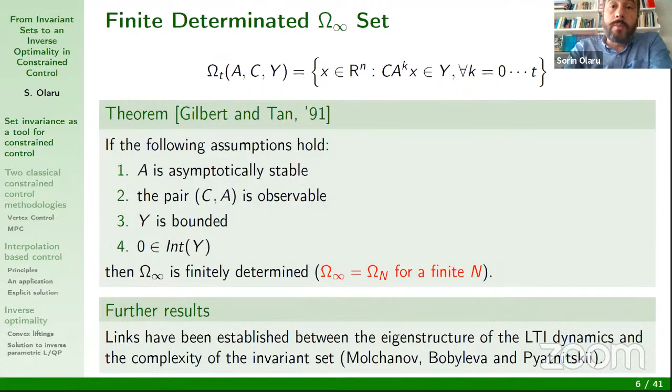The links between the eigenstructure of the linear operator defining the dynamical system and the complexity of the invariant set has been studied in some classical works coming from the Russian school, with Molchanov, Bobyleva, and Pyatnitskii.

And I will add to this broad picture and basic definition some links of set invariance with stability. If somebody provides me a set, I'm not trying anymore to construct the invariant set myself. Somebody, an oracle, comes and gives me a polyhedral set, and I have to certify if this set is positive invariant with respect to, again, let's take a simple dynamic here.

Well, in the 80s, there was a very elegant result showing that such a property can be certified by the existence of a matrix H with non-negative elements, and this non-negative property of the elements of H is very important, satisfying some simple linear inequalities. I won't enter into the proof of these results, but I will only stress that the constraints here are linear. So practically the certification is passed through a very simple resolution of a linear program.

At the same time, another important aspect is that the non-negativity of the elements of the matrix H relates the constraint linear dynamic to a positive dynamical system of dimension R, where R is obviously different from N. So we have positive invariance if there exists a sort of comparison system which respects the same stability properties, but has on top of that some positivity characteristics.

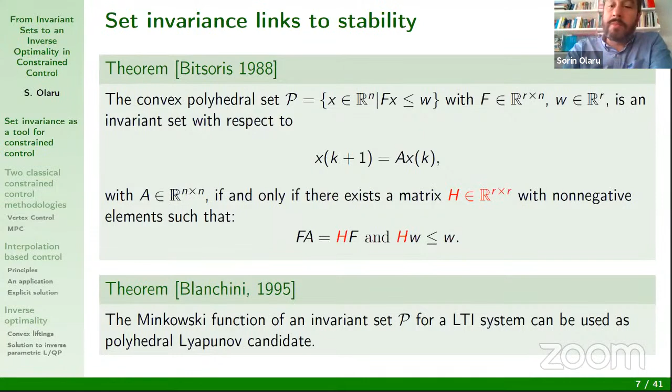Going further, for any invariant set which is endorsed with some contractiveness properties, we can use the respective invariant set as a polyhedral Lyapunov candidate, and this proved to be a very versatile tool in the analysis of different classes of dynamical systems, like hybrid systems, switched systems, linear parameter varying systems, and so on.

Okay, in the few slides I've shown so far, the system was autonomous. Well, what happens when the system we're dealing with is to be controlled? We can choose the input U in order to enhance the positivity properties. For example, if the system is not stable, U will have the main objective of stabilizing the system. And then additionally, we can look further and try to enlarge the positive invariant set related to the closed-loop functioning. So the definition is simple.

So now any initial condition in the set has to have an associated control law, and this control law will drive the trajectories, at any future time step, to stay within the set, not violating the constraints. Again, the same question: can we construct these sets? And the answer, at least in the linear case, is positive.

Yes, for discrete-time linear systems, for example, we can pass by the Minkowski addition of the different bounded sets in the assumptions, like the state constraints and the input constraints, and we can construct a sequence of sets. These sets approach the maximal control invariant set.

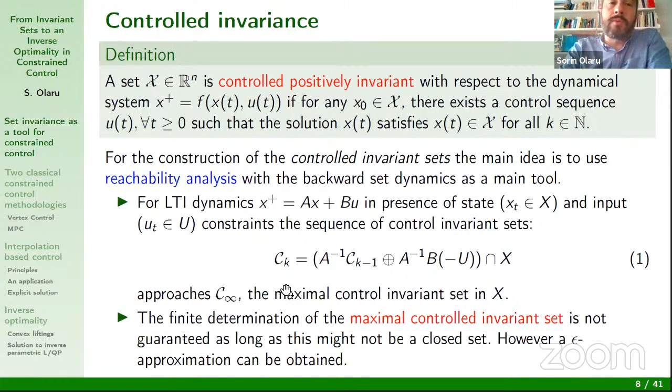So, well, having these tools in our backpack, we can look at different ways that control engineers design feedback control in order to satisfy constraints and enlarge the domain of actions. A historical strategy, by now more than 30 years old, is the so-called vertex control, established by Per-Olof Gutman and his collaborator Cwikel in '86.

At that time, the parlance wasn't talking about control invariance, but if you look at the conditions established there, they said the necessary and sufficient condition for stabilization of an LTI system with polyhedral state and control constraints is to have, at each vertex of the feasible set we're trying to characterize, at least one control U that brings the state to the interior of the set. That's exactly the definition of control invariance. So practically, they link constrained control design to the existence of a control invariant set.

More than that, the result proposes a practical way to combine those extreme actions at the vertices of the feasible domain. At each vertex, there is a vector field, or one-step control action, which pushes the trajectories within the set. Based on the control action at each vertex, we can split the feasible domain into simplices, and in each simplex we use a convex combination of the control actions on the extreme points. That's the essence of vertex control: use convex combinations of the extreme control actions on the boundary of the control invariant set, giving us a closed loop system.

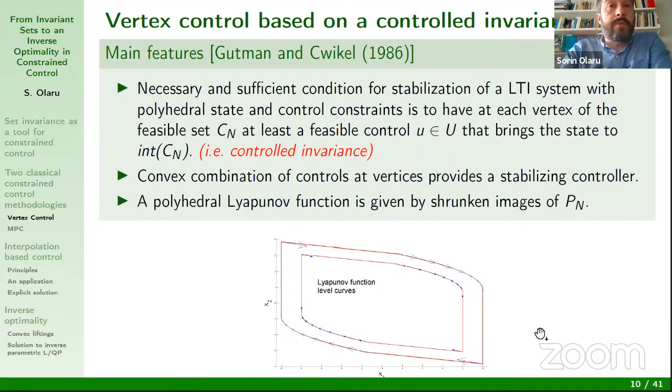It's one of the first methodologies that starts from sets and builds a control action satisfying the constraints and ensuring closed loop stability. Of course, since we have a control invariant set, this relates to the existence of a polyhedral Lyapunov function, and because we're practically shrinking the Lyapunov function, we have a homotopy between the feasible set and the Lyapunov function level curves.

That was vertex control—a very simple approach. Once we design a control, we have a control invariant set with only the control action on the boundary, and we can completely fulfill the control definition in the interior. But that doesn't come with any performance whatsoever. And we know from optimal control theory that we can design elegant and mathematically sound theory starting from the optimal control framework.

The problem with the optimal control framework in conjunction with constraints—with the existence of state and input constraints—is that it becomes intractable. So the control action there cannot be solved with an optimization in real time. Of course, there are cases when we can find a bang-type policy, but those cases are rather particular.

Then in the 80s and 90s, the so-called model predictive control came with a framework for designing constrained control based on optimality. There's an optimization of a cost function that runs on a finite horizon from the current step in the system evolution to k plus n—that's the prediction window—to which we add a final term, a penalty on the final state, and then add the state evolution constraints and all the static constraints from the state and input limits, and, very importantly, a terminal constraint.

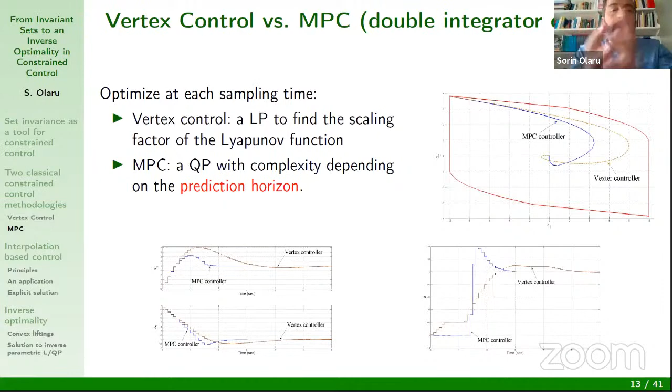But in between these two extremes, for a long time, there was nothing to bridge the gap. If I want to be not that performant, but a little bit faster, what is to be done? Then in the years 2000, there was research attention dedicated to how to speed up the MPC implementation.

And we reached the era of the so-called explicit MPC, where the Karush-Kuhn-Tucker optimality conditions have been used to express this optimization problem, which is solved at each moment in time, practically exploiting the active sets and the optimality conditions in order to devise an explicit formulation.

So it has been shown that practically the feasible set can be partitioned into a union of polyhedral sets, and within each such polyhedral set, we can define the optimal control action in terms of an affine state feedback. For example, again for the double integrator we saw before, for this type of simulation, the control action is given.

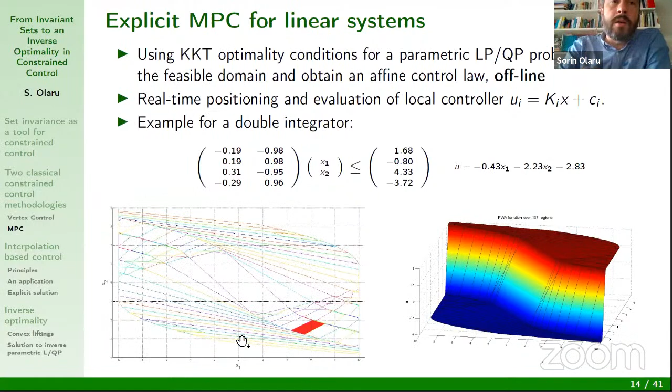So what we can do, if we have only the outer set and the inner set, to avoid high computational load, given a state at some current time step, we can look for a pair of points: XO, which is in the inner set, the control invariant set with high performance, and XV, which is a point in the outer set.

If this pair of points describe my current state as a convex combination, then the associated control law, which interpolates with the same coefficients the control action at the two points, might have very interesting properties. You can say, well, we have linearity and convexity of those sets, so I can see the trajectories will stay in there.

What about the convergence of such a policy? Well, we have a theorem saying that the control law, any control law obtained by such an interpolation, is recursively feasible, as we already discussed.

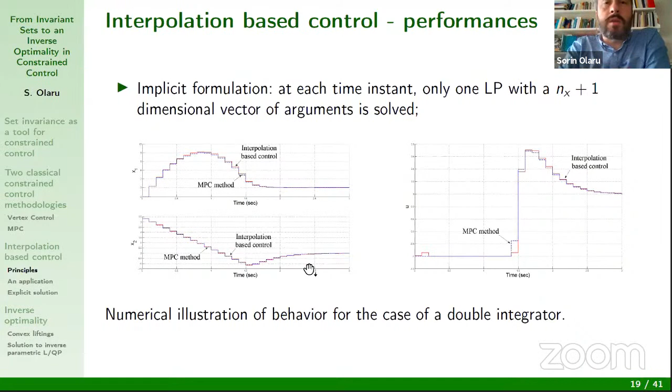Well, you recall vertex control was very simple, but not very performant. With interpolation control, we bridge this gap. We have MPC-type control action for a double integrator, and practically, with a very simple interpolation based on linear programming, we obtain a control action which is very similar.

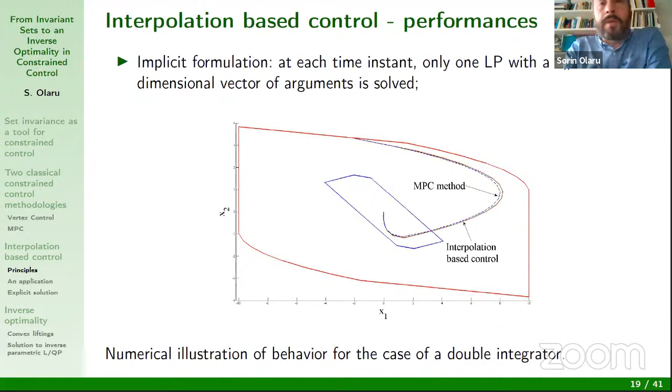And the trajectories in the state space are extremely performant. That would be, in the phase plane, the MPC closed loop versus the interpolation-based controller. This proves visually that interpolation-based control bridges the gap between vertex control and MPC performance, all while having low complexity.

In this application, you have test cars in a virtual reality, placed on a moving platform, a hexapod, that can have longitudinal and lateral moves at very high accelerations, and can also tilt and move. The idea is to offer the driver a real-world sensation of driving. The problem is that this platform has limited size in both X and Y directions, and we also have constraints from the acceleration point of view.

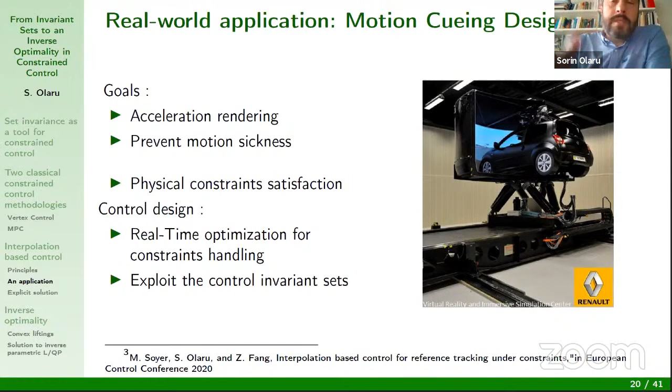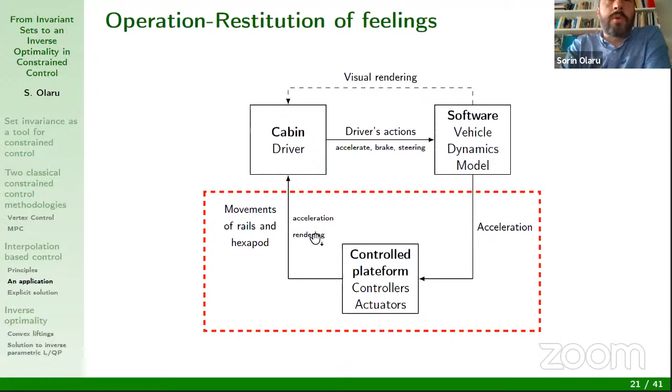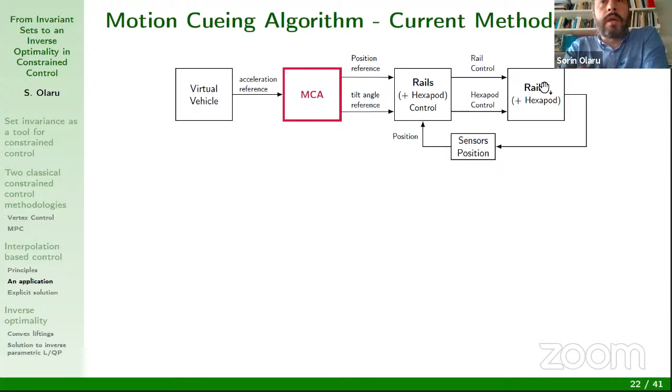So how do we design this closed loop to provide the cabin, the driver, the acceleration they would have had in real time in a real driving car? We know what the virtual vehicle has to do, but we have a constrained platform, and we have to render an acceleration as close as possible within the limits of our constraints. We can act on the rails and the hexapod, use the sensors, and this is done naturally in a constrained MPC, where we take the acceleration, feed it back with constrained optimization, and close the loop.

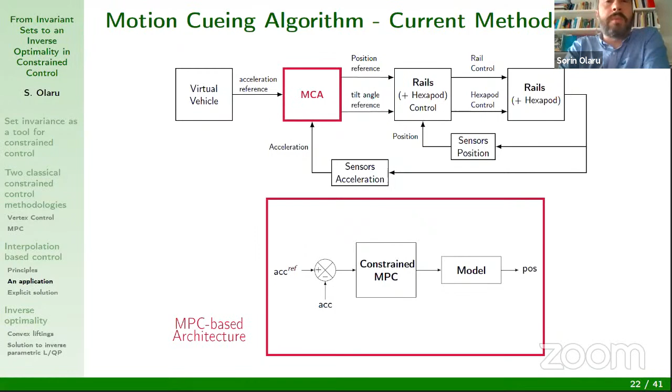Unfortunately, the computation time has to be very low, less than a millisecond, in order to control this mechanical system. So what we've done is implement the control algorithm based on interpolation, where we knew a priori which are the high performance invariant set and the outer practically maximal domain of constraint control operation, and then we mix them in an interpolation-based control, as you saw previously, in order to operate the system.

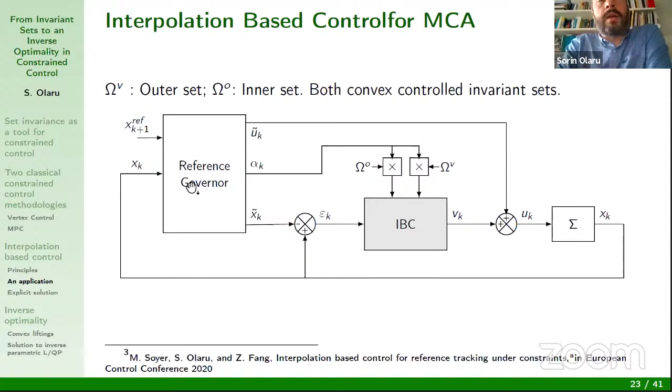There is a supplementary element here. You need a reference governor, because all the presentation I've done before was about regulation at the origin. Now we want to track some reference here, and those sets are not centered on this reference. So you have to add an additional level of reference governor, where you find the closest recentering of your set according to the topology of the invariant set.

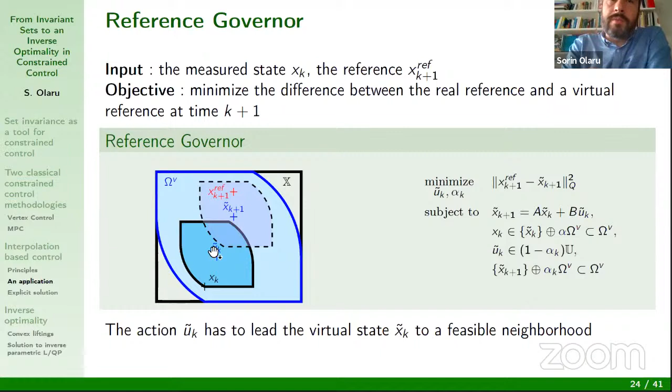So that would be, if I'm in this state here, I cannot go to the red set, but I can go to the X tilde in here, which is a new reference. So I'll start moving to this one, and as I'm moving towards this position, then I can scale the invariant set and shift them, and in this way advance towards the real reference that I'm willing to track. So we have the low complexity interpolation based control, and then this reference tracking strategy.

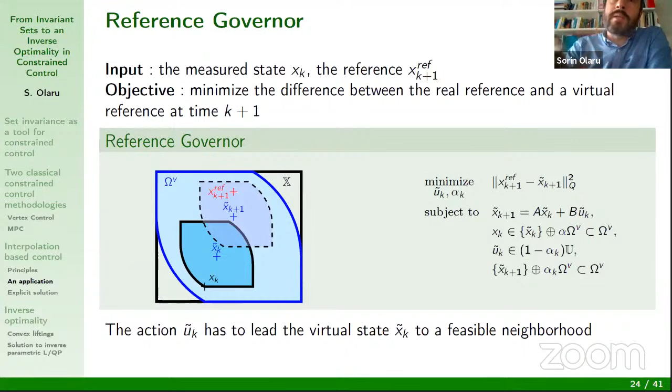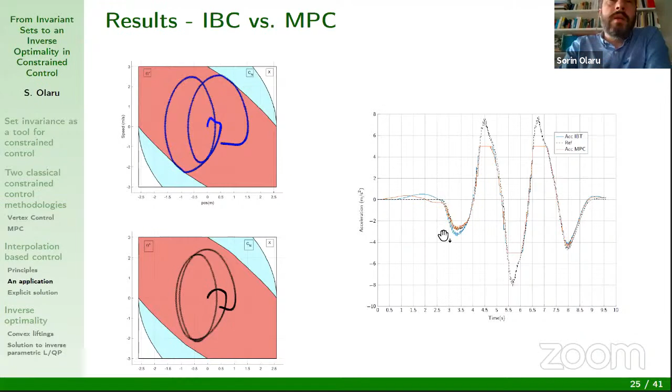You can see here, for example, that would be an ideal car running on the circuit. And as we are running in a virtual environment, we have saturations from the hexapod and the control actions, and then practically the MPC and the IBT, the blue and the red, are very close to one another, but the IBT provides higher acceleration, better acceleration than the MPC.

5-10 minutes to go a little bit beyond this rather structural and computational aspect. We may wonder about explicit MPC, about the structure of this interpolation-based control. We saw that the MPC has a piecewise affine structure, and we can have explicit solutions.

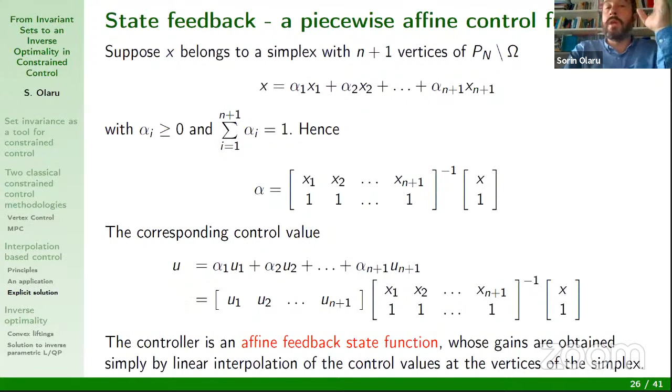So the question is, will that be the case also for the interpolation-based control? And in fact, the interpolation-based control is nothing else than, as I was saying, we find n+1 points in there, and then based on this coefficient of this interpolation, we mix the control action on the extreme points. It's a little bit like in vertex control, only that we are not playing only with the outer set, but with two sets in this interpolation. And it can be shown that we preserve practically the same structure, the same piecewise affine structure over a polyhedral partition of the state space.

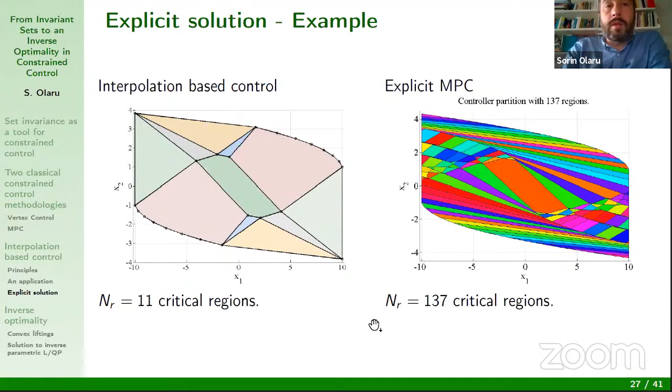So if we compare the explicit MPC, with a very complicated explicit solution, using the interpolation-based control and the explicit formulation, we can go practically one order of magnitude lower in complexity. That would be, for example, an MPC controller in explicit form, and that would be the interpolation-based control, again 10 times lower complexity.

And seeing this kind of result, what we can ask ourselves philosophically is, okay, we saw the MPC is very performant. With the interpolation-based control, practically we get the same performance at lower complexity, but is there any other even lower complexity? What is the lowest possible optimization-based control which offers the same domain of attraction, the same control invariant set?

So this turns out to be a very complicated problem, and it's related to inverse optimality, because we try to construct an optimal control problem that will have as a solution a certain domain, and maybe also a given structure if we have a priori piecewise affine characterization, for example coming from MPC. And we try to solve this problem.

In a nutshell, the problem that we try to address is the following. Given a polyhedral partition, that is your best piecewise affine controller, that's the control action that we want to obtain, to replicate by an optimization problem. We try to find a convex cost function equivalent with the optimal control cost function, and the set of convex constraints. The convexity obviously comes in there in order to have a friendly optimization problem, such that the result of this optimization is exactly the ideal control action that we would like to implement.

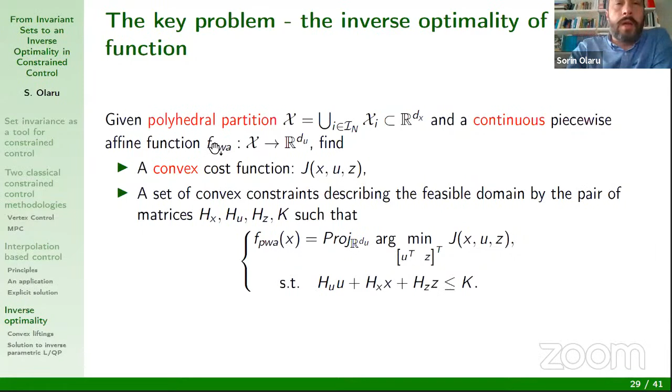So in order to solve this problem, we have to pass through the concept of convex lifting. Why?

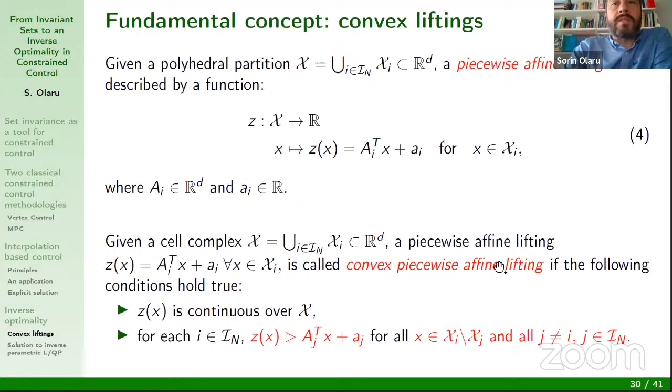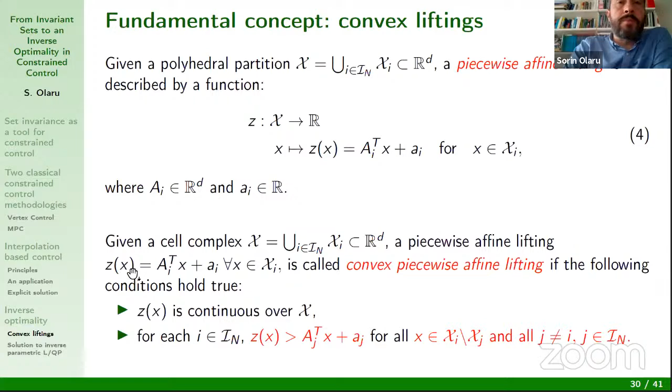Because we have this partition, and the partition itself doesn't give us the full information on the topology, only by storing such a collection of convex sets do we avoid the complexity of different subsets or unions. So I'll call it convex piecewise affine lifting: a function that goes into a higher dimension. I'm looking for a function which is continuous, and the epigraph of this function is convex, such that the faces of the function z of x project onto the partition itself.

Many words don't help from the understanding point of view, so let me use a very simple illustration instead.

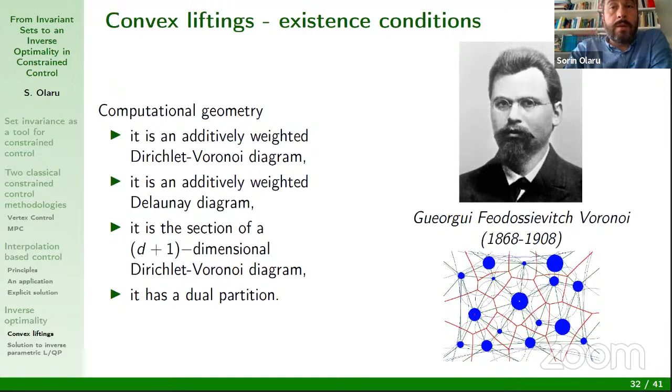And the answer is found at the end of the 19th century in the work of Gueorgui Feodossievitch Voronoi, who looked at this type of construction where we try to partition a given region in state space into regions where all points are equally distant from their neighbors. He showed that this type of construction relates to a convex function, via the projection of a convex function from a higher-dimensional space. So practically you have the conditions for the existence of such a convex liftable function.

So in the few slides I have to show next, I start from the assumption related to the Voronoi work: that my partition is convexly liftable, and the set itself, my control invariant set, is a partition of a polytope — so it's a polytope in itself. If this holds, let us illustrate this.

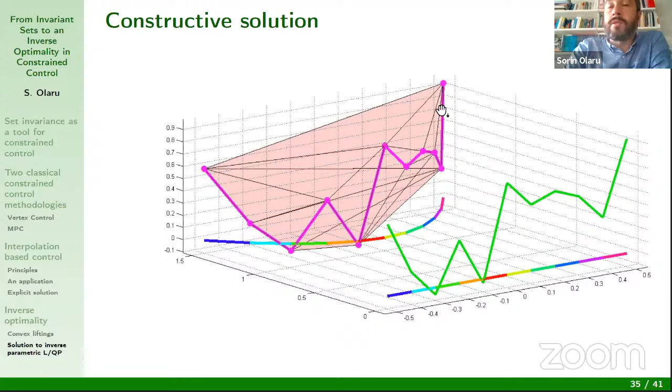By taking the convex hull, I obtain a feasible domain. That feasible domain is convex and can be used by an optimization problem to always position at the lower point in this convex domain. This is essentially the geometrical construction of an optimization problem that solves the inverse optimality problem for any piecewise affine controller, for any constrained controller.

And there are two implications, two theorems. One theorem says that any continuous piecewise affine function defined over a polyhedral partition can be obtained by parametric linear quadratic programming with only one supplementary variable — the prediction horizon, if you want, in MPC. The corollary is that whatever MPC design you are doing, there is another MPC problem with practically the same performance and only two prediction steps. This is the lowest complexity you can ever achieve.

A simple illustration: starting with a double integrator, with constraints on the input and output. Let's take a not-too-high prediction horizon of 5 steps. You have this explicit solution here. And if you work with inverse optimality, then instead of working in dimension 5, you optimize only in dimension 2, which is obviously a huge difference.

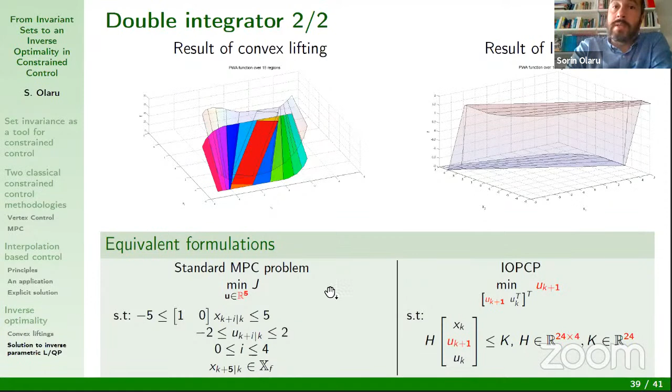As for the number of constraints: you have roughly 3 times the prediction horizon, which is 5, so about 15, plus the constraints coming from the terminal constraint — so about 20 constraints, while the inverse-optimality-based controller has 24. So practically the same complexity in terms of constraints, but instead of working in dimension 5, we are optimizing in dimension 2. That will be the end of my talk.

I wanted to stress that invariant sets play a crucial role in constrained control design. They can be found in MPC, in vertex control, interpolation. All those techniques use it.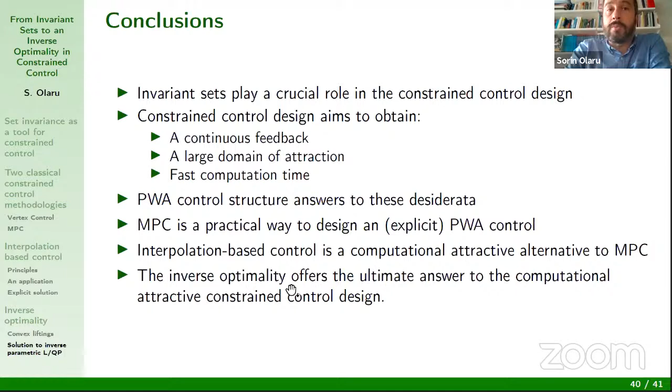If we look at the structure of the controller, often for linear systems it's a piecewise control, meaning the closed loop is a hybrid system. It's rather computationally expensive to construct an explicit solution in higher dimensions. However, it gives a lot of insight into the structure. And if we want to understand the limit of complexity, we have to go by inverse optimality, convex lifting, in order to understand what can be done. This was what I wanted to convey to you this morning.

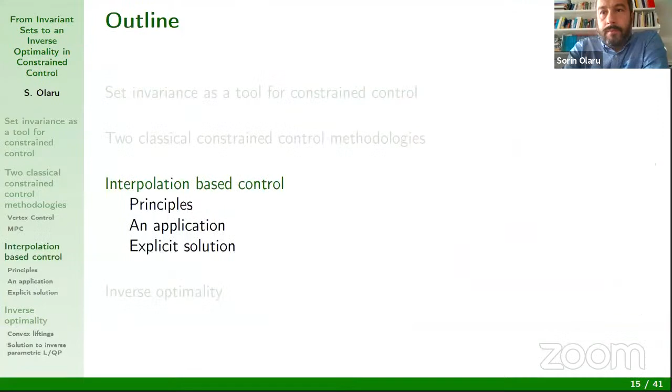I have one question, Professor. Could you show slide 16? Yes. Oh, maybe 17. With the algorithm, with the LP problem. Yeah, okay, thank you. So I see.

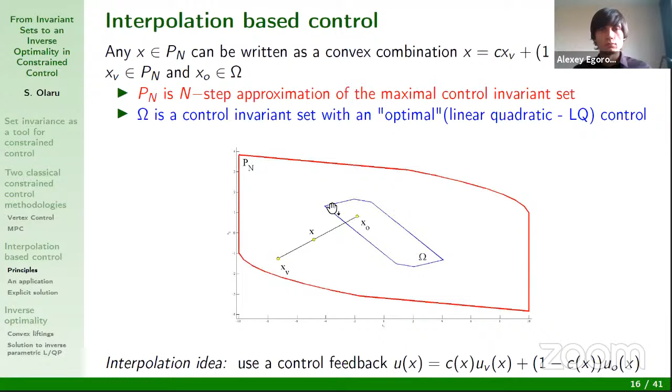So the feasible set, the big set in your pictures, is polytopic. Yes, the outer set that we have here is polytopic, and practically it plays a role in the choice of one of the interpolation points. Of course, you should be inside this feasible set. Yes, this point has to be in the red set, and the other has to be inside the small set. And now, those are the two constraints.

And now I wanted my current state to be on the line which unites these two points. Sure, I see, yeah, that was my question. How do you take into account the fact that XV is inside this feasible set?

And another question, maybe a naive question about invariant sets: are they robust with some perturbations?

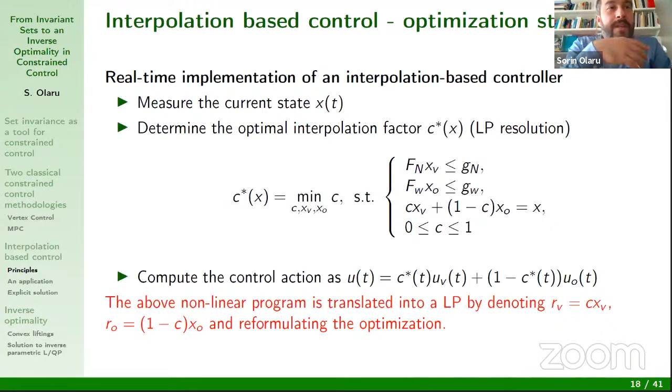Well, that was a dilemma I had when presenting the material. I chose to present here only the results without disturbance. But the original definition says that the set is invariant if there is a U. There are two signals here, the control and the disturbance signal. So the solution satisfies the constraints, but the disturbance is somehow hidden. What are those exogenous signals doing? This one is my control, so our work is to design this for positive invariance, while this one plays against us.

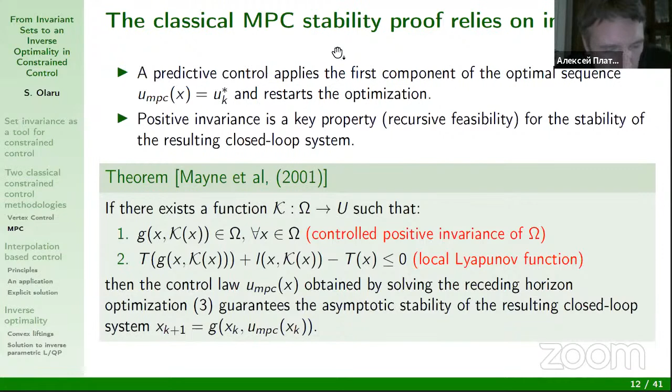Well, I would like to see the autumn in St. Petersburg, but we unfortunately have to wait a little bit for this pandemic to pass by. So good luck with the organization, and looking forward to the next days of the conference. Thank you for your participation. Indeed, this year is nice. Yes, well, okay, thank you. Thank you, thank you, goodbye. Goodbye, thank you, goodbye colleagues.